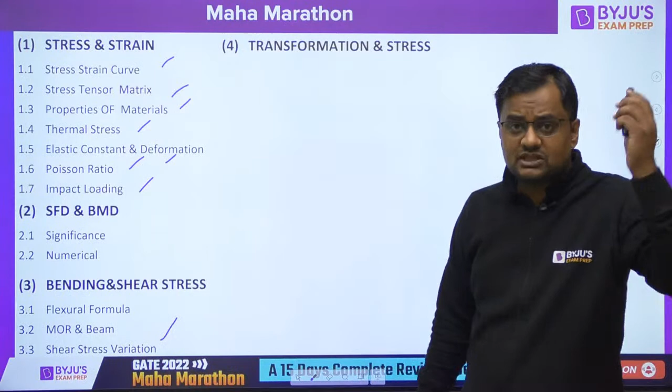Analytical method, graphical method, Mohr's circle for strain, then torsion, shear center, spring, column, then pressure vessels, thin and thick shell. But of course guys, this will be done in two sessions.

Today, most probably we'll be doing the first chapter, second chapter, and third chapter. This is more than half of the SOM. The first, second, and you can take it as third and fourth - bending stress and shear stress separately. So these things we'll be covering today, and that will be more than half of the SOM.

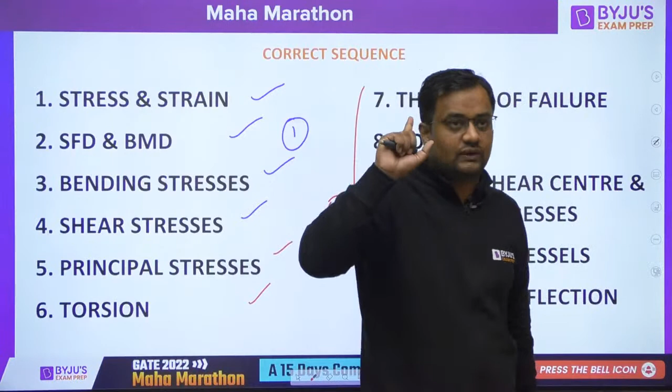So guys, one thing I want to tell everybody, very important information - how many tests I have to give. Many questions are coming to me on my mail or my Telegram: Sir, how many questions do I have to give? How many tests do I have to give? Let me tell you the answer.

Guys, if you have not started giving tests till now, you have to only give full length tests, not the subject test. Another thing - how many tests sir? If you are giving the test for analyzing your mistakes and improving the concepts where you made mistakes, let me tell you - whatever wrong you do in the test, you will again study that concept, again grasp that concept, or if there's some other question you don't know at all, then those concepts you will study.

If you are giving tests for that purpose, the number of tests should be at least 15 to 20. Whatever mistakes you make, whatever concepts you don't know, you will study those again. But if you are giving the test only for time management, you won't be studying those questions or concepts where you made mistakes. You will do your own revision irrespective of the test series. In that case, at least 5-6 tests are enough if you're only doing it for time management.

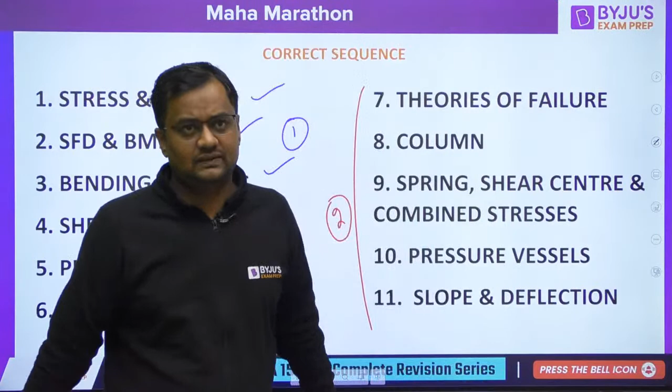Let's move further. The book for SOM is Gere Timoshenko, guys. So let's start the first chapter, stress and strain.

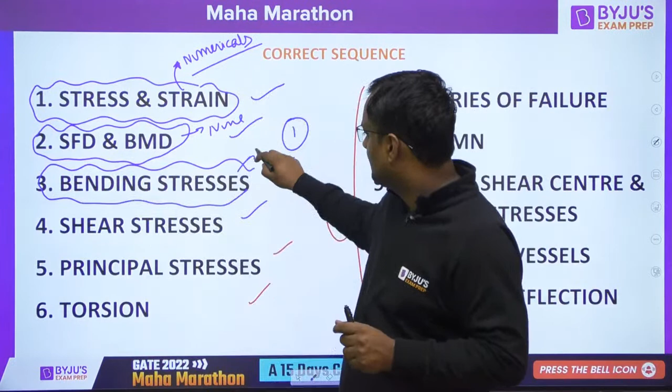After completing this chapter we'll be doing numericals. This will be a very, very big chapter, then this will be small. Then we'll again be doing numericals here also today. Then we'll be studying this, and doing numericals here.

Let me tell you one more thing. Let us try to do principal stresses also today if time permits, otherwise we'll do it tomorrow. Guys, those numericals, 90% will be new, that I have not ever taken in any of my previous classes.

But guys, again, many students are thinking that if sir teaches us, that will be enough, we'll give the exam. Guys, see, this is a GATE exam. Around 1,30,000 people will be fighting for the rank. And out of this 1,30,000, I never ever believe that the competition is 1,30,000.

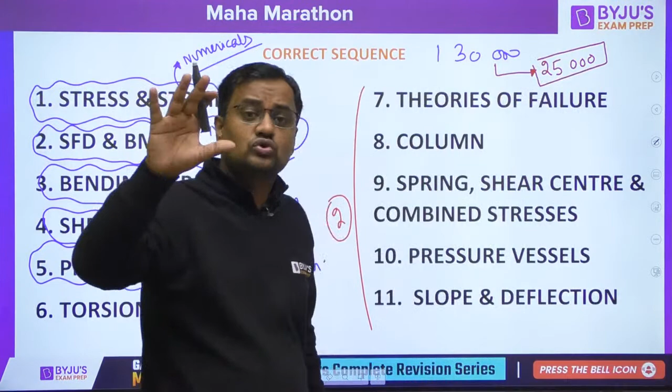No. Out of this 1,30,000, guys seriously preparing will be only around 25,000. Seriously means those who have covered more than 70% of the syllabus. If a student has only completed 40% of the syllabus, I am not considering him serious. So that will be your real competition, guys, everybody.

Now, moving forward, let us come to the basics of SOM, from where the subject originates. Where did this subject come from, where do people come from, like in the Jolly LLB dialogue.

Where is my session? Okay.

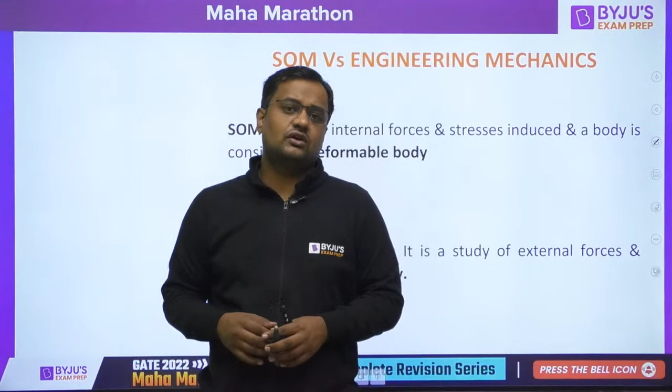Any body, suppose this is a body, and in this body if I apply a force like this, P1 force, if I apply a force like this, P2 force, and if I apply a force P3 like this, and the body has 2 points, suppose A and B here, and whatever the number of forces I am applying, not 3, might be 10, might be 20, whatever the number of forces, whatever be their magnitude, whatever be their direction, if the position of A and B is not changing, then that is called as rigid body.

Then that is called as rigid body. If whatever be the number of forces, not 3, suppose 15 forces, 105 forces I am applying, and after the application of those forces in any magnitude, in any direction, if the position of A and B is not changing, that is called rigid body.

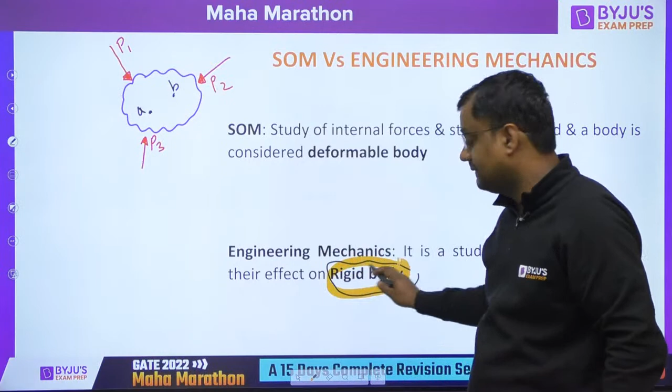In your 11th class, Monimita, actually spring is not in the syllabus. They have not mentioned the word spring, but sometimes they ask the question.

Now guys, see, whatever the number of forces, if the position of A and B is not changing, that is as it is, that is a rigid body. Whatever you have studied in 11th class, Newton's law of motion, gravitation, S equals ut plus half at square, rotational motion, gravitational motion, every physics, that 11th class physics, that blue HC Verma, everything that is rigid body, consider the body as rigid. Engineering mechanics, you consider the body as rigid.

In real life, no body is rigid. Sir, iron is rigid, sir. Guys, come on, what if you apply the force, iron will, the dimensions of iron will be changed. That little change is not visible by naked eyes. That little change might be 0.000000001 into 10 to the power minus 5 meter, or a micrometer. So nobody in this world is rigid.

Every body is deformable body. Deformable means, guys, the position of A and B changes. Either the body shape will be changing, dimensions, A and B will become closer or move farther, or the orientation is changed. That is deformable body. And first time a student studies deformable body when he comes to strength of materials. See this, like this chappal, okay, this compressing, this is a deformable body.

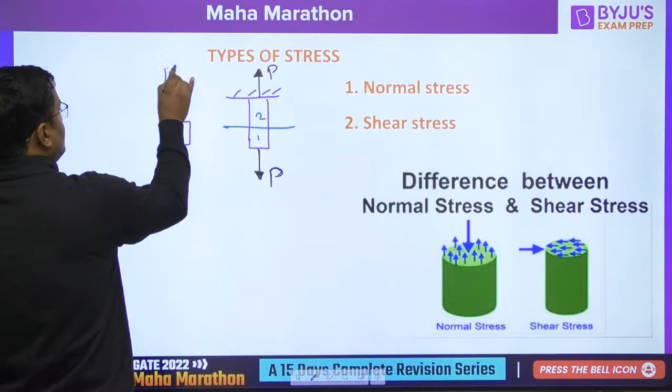Then after cutting the body from here, this is 1, this is 2. Many people know this already, let me just tell you very fast so the time is not wasted. This is 1, this is 2. In one body, the external force that I am applying, that machine is applying - externally I am applying it, I am applying the force. This is external force. Suppose somebody broke my heart, it's paining, that is internal force.

Now see, this is P force, this is external force, means somebody is applying or support reaction is coming. So guys, whole body is in equilibrium. This body is in equilibrium. So small body has to be in equilibrium. If this whole body is in equilibrium, so small body has to be in equilibrium.

So making this equilibrium, a P force is coming like this. Now it is in equilibrium. See, this whole body is in equilibrium, so a small part is also in equilibrium. Guys, if I am in equilibrium, my nose is also in equilibrium. My nose is not going to office. Right now I am in my home, so my nose is also in my home. So this P force is going upward, so for balancing, P force is going downward. Okay, sir, got it, sir.

So stress is internal force by area, this P by A. Stress is not external force by area. No, not at all. Internal force by area. Okay, sir, got it, sir. What is internal force? The external force is what you are applying, or a machine is applying, or a support reaction. What is internal force? Internal force is that which is obtained after cutting the section. See, here no force is applied. After cutting the section, to balance it, internal force is coming. Actually, no force is here.

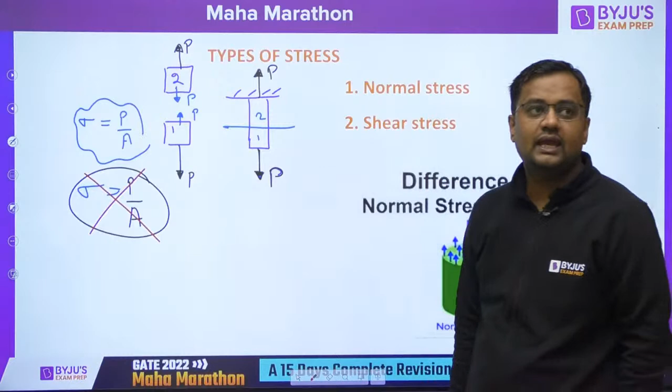Okay. Sir, what is shear? Normal stress is where the internal force is perpendicular. And shear stress is where it is tangential. This is normal, this is tangential. Sir, where will tangential be coming? Where will tangential be coming?

Let me show you. Suppose this is a beam. See above your head, there are many beams now. One, two, and third is here. Three beams here. Now, if this is the beam and supported over a column, this is my beam. Abhinav sir's beam. Abhinav's home. And this is the beam, and here is the column. Making a simple case, actually the beam is not that simple as you are seeing.

And I am living on the 9th floor. Oh, okay. Vivek. I'm not teaching. Vivek, not enjoying? You can go. Okay, so Joshi sir is also here. As I told you earlier, I showed you the pic also. Joshi sir will be coming at 5 p.m. Very soon he will be coming to my home. Joshi sir, at what time are you reaching here? Please let me know in the comment section. Kahan gaye Joshi sir? Oh yeah, Joshi sir is also here. Where have you reached now? And put a screenshot. Okay. Now,

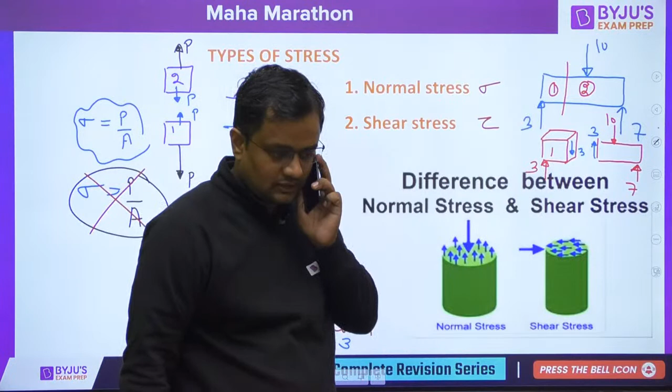So this 3 is upward, so 3 is downward for balancing. And here 10 is downward, 7 is upward, so 3 is upward for balancing. So this 3 on this section is shear. 3 shear, tangential force. So tangential force upon area is shear stress. Okay, now one question, everybody, please reply. Let us see who can reply fast.

This is, suppose, Joshi sir's suitcase, and he is on a railway station. This is the platform. This is Joshi sir's suitcase. And here, suppose Joshi sir is sitting over it. The platform is too crowded, he is not getting any seat. And Joshi sir of 80 kg is sitting here on the suitcase.

Let me know what are the stresses coming on this soft, delicate suitcase? Everybody, please let me know. What are the stresses coming? Is it normal? Is it shear? Is it zero stress? Ground reaction will again be 80 kg for balancing, because the suitcase will be in equilibrium.

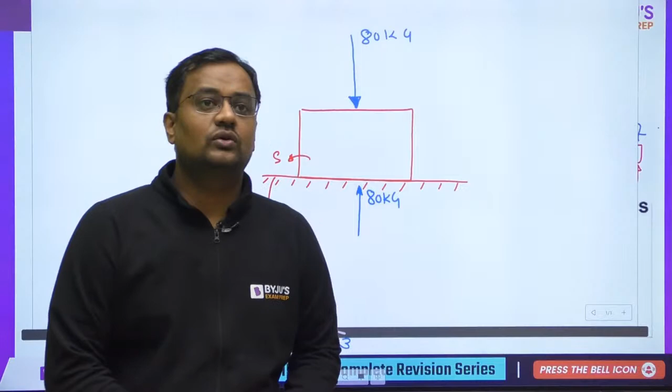Okay, Rupesh, everybody, good morning. Please let me know. Okay, guys, Aman is there. Nitish, Lavanya, Sarang, Alok, Himanshu, Sarthak, Karan, Kalidasan. 100%. Diksha, you also? Normal? Himanshu, Aman, I got your answers. Come on, Mohammed, Alok, Guna, my God, you will give me a heart attack. Oh, good, Kushagra. Good, Varsha. Only 5 people. Varsha, Himanshu, and a couple more. You will give me a heart attack here. In online, the teacher will die.

Those who are coming to my classes on YouTube or the app, many times I told you, 99% who say normal are wrong. Good, Jyoti. Guys, that depends on the plane. If I cut this plane, suppose this XX. On this XX plane, yes, this force is normal. On the XX plane, sigma xx is coming, but there is no tangential component. On XX only normal force is coming.

But as soon as I take a YY plane, this 80 kg is like this. So this has 2 components. One is like this, one is like this. This is suppose alpha, this is suppose beta. So normal stress on the YY plane is alpha upon area of YY, and shear stress on the YY plane is beta upon area of YY. So sigma is also coming, shear is also coming. That depends on the plane.

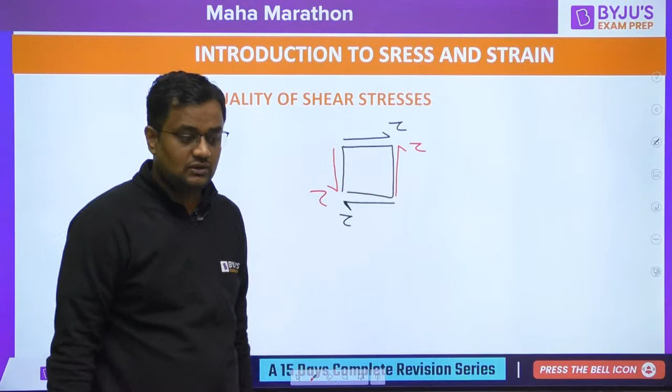Guys, can you tell me one thing? This question has been asked many times, not only in GATE but other exams as well. Two times in MPPSC, a couple of times in APPSC, and one time in Karnataka in the last 5 years. My question is, why are the opposite stresses equal? Please let me know.

Opposite face stresses are equal due to which equilibrium? Please, everybody, in the comment box. And why are adjacent faces equal? Opposite faces are equal due to force equilibrium, and adjacent are equal due to moment equilibrium.

Let me make you feel it now. Everybody, please see. See this opposite tau, the black ones. If one of them is bigger, the body will move to the right side. We study equilibrium bodies. If this red tau is bigger and this is smaller, the body will move upward. If this tau is bigger and this tau is smaller, the body will move downward. So opposite are equal due to force equilibrium.

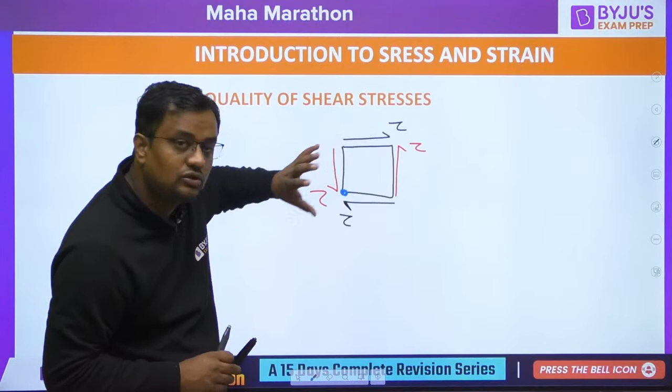And suppose I consider a moment about this point, blue point. See, both are passing from here, so no moment. If this black tau is greater than this red one, black about this is clockwise and red about this is anti-clockwise, assuming this to be a square element, although the validity is for every body. Suppose black is greater, making it clockwise about this blue point, and red is anti-clockwise. So this will move clockwise if black is greater. If red is greater, it will be anti-clockwise.

So adjacent are equal due to moment equilibrium. Many times this question has been asked. And opposite are equal due to force equilibrium. Okay, great. Now guys, let me tell you what is this stress in 2D, 3D.

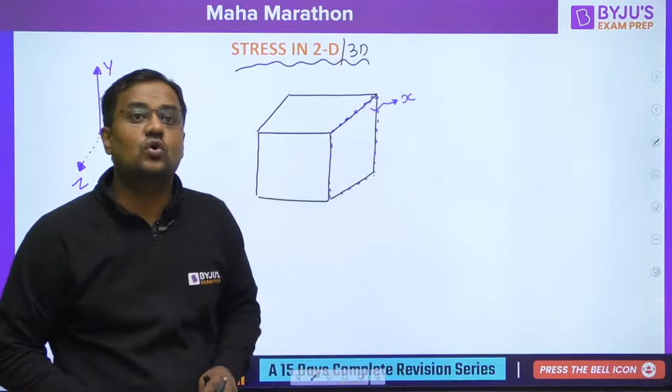Those who are saying XY, they are going into the coordinate system. So this is X face. Now this face, this red face. Outward normal, going outward, not inside the body. Outward is going in Y direction. So this is Y face.

Now, similarly, what is this face? I will tell you very interesting things here. Outward normal is going in Z direction, so this is Z face. Okay, great. Now, what is the name of the base where it is resting? What is the name of this base face?

Come on, Raghu, very close. Come on. Guys, what is the name of the base where it is resting? Yes, Raghu, good. Mokshin, Kalidasan, good. Nitish, Jyoti, good.

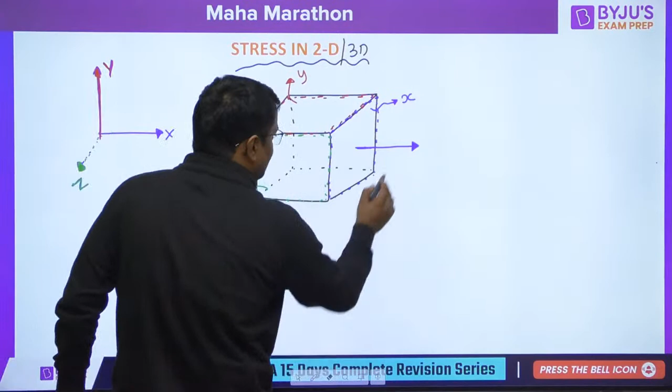In this face, what is this purple arrow? What is this stress, sigma or tau? Is it sigma on this x face, or is it shear? Sigma, because it is normal to the x face. Sigma, then the name of the face, x face, then the direction, x direction. Simple. Now similarly on this purple face, what is this? Normal or shear? Shear, tangential.

Come on, yes, everybody is correct. This name is tau. On which face? First word is face, and second word is direction. On x face, in which direction? Y direction. Simple. Everybody, what is the name of this? Tau. On which face? X face. In which direction? Z direction. Understood. Everybody now champion.

Guys, this is normal or shear? On Y plane, this is normal or shear? Everybody, come on, Mansoor, Jyoti, Vasu, how are you? What is this, sigma or tau? This is sigma, perpendicular to this red body. The first word is face. On which face? Y face. Second word is direction. In which direction? Y. Understood, sir? This on red face is shear.

Where I write, this is shear. On which face? Y face. In which direction? X direction. Now this shear. On which face? Y face. In which direction? Z direction. Understood, sir? Now I am coming on this green face.

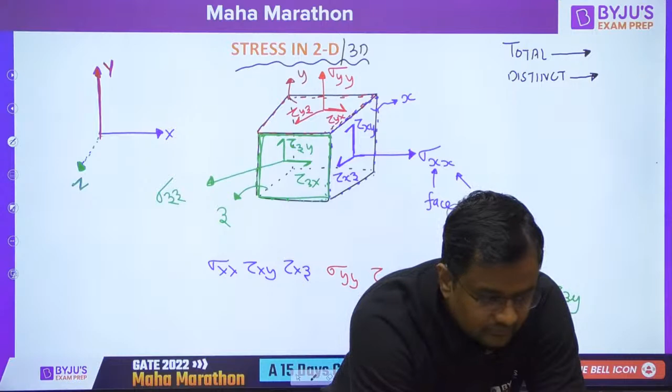Guys, GATE has asked this question. How many total number of elements are there? How many distinct elements are there? What is the total number of elements and what is the distinct elements? Come on guys, reply. Soon we'll be going to the questions of the first chapter as well. Yes, great.

So total number of elements are 9, 3, 3, 3, 9 and distinct are 6. Why distinct are 6 guys? Because we just studied that adjacent face stresses are equal. Good. Everybody is champion here. Whole competition of the GATE is lying here in this channel.

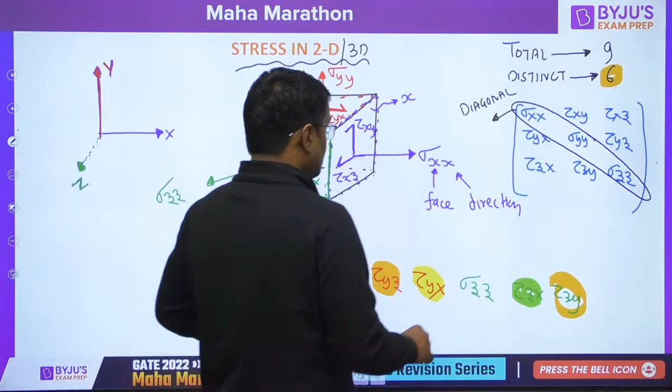Okay. Now guys, this is symmetrical about the principal diagonal. This is the diagonal, and it is symmetric about this. Please check whether it is symmetric or not. See, tau xy and tau yx are same. They are same. Similarly, my friends, tau xz and tau zx are same. Similarly, tau zy and tau yz are same. So it is symmetric about the principal diagonal.

Got it? Shubham, you got it now? How distinct 6? Okay. So this is symmetric about the principal diagonal. So if somebody asks you why it is symmetrical, the answer will be moment equilibrium. The adjacent faces are equal due to moment equilibrium.

Okay. Now what is the order of tensor? Guys, see. 3 to the power x, where x is the order of tensor, is equal to the number of elements. Number of elements in 3D case: 1, 2, 3, 4, 5, 6, 7, 8, 9. So x is equal to 2, that is the order of tensor. So if anybody asks you what is the order of tensor of stress, it is 2. Stress is not a vector. Stress is not a scalar.

Why not vector, sir? It has direction. Sir, normal stress has a direction, shear stress has a direction. No, because guys, it does not follow the parallelogram law of addition. They teach wrong in school. NCERT is wrong. Okay, Joshi sir.

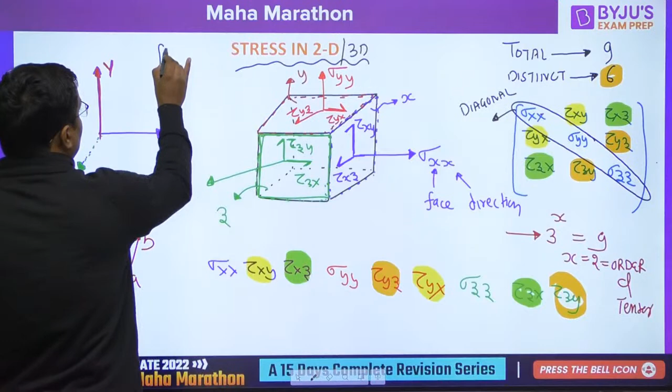Guys, this is in 3D. In 2D, how will it be? See, remove Z from there. Sigma xx, tau xy, and here tau yx and sigma yy. In 2D, this Z will not be there.

In 2D, total number of elements are 4: 1, 2, 3, 4. Distinct are, see everybody, this and this are same. So 1, 2 and either of these two, only one is required. So distinct are how many? 3. And order is only calculated in the 3D case.

Have you got it, everybody? Just put a heart sign if you got it, guys. Have you enjoyed the concept or not?

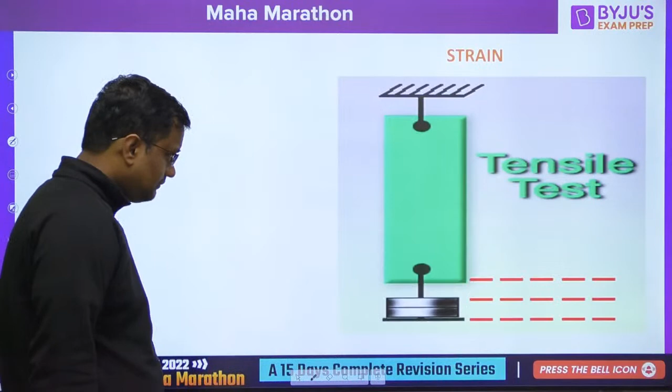Okay, now guys, what is strain? Sir, stress you have taught everything: the matrix, the direction, nomenclature. What is strain? Guys, since we are studying deformable physics, in deformable physics there is some strain. Let me tell you. In deformable physics there will be some deformations. Length will be changed, either increase or decrease.

Suppose this is a body. I am applying force. The length was L and it is elongated by delta. Why elongated? Because it is deformable physics. Strain is equal to delta by L.

My two questions, and you have to write the answer in a single statement. Yes, Ahmed Sahab. You have to write the answer like this: A comma B. Don't write two answers differently. In a single comment I want the answer. Okay, hello Mudassir. First one, if I apply a force, of course deformation will be very, very small, not visible by naked eyes. My question is,

strain of a body when I apply force is in kilometers or micrometers? Write the answer here, then comma. What is the strain of a rigid body? First, unit of strain: should it be in kilometers or micrometers? Second answer, strain of a rigid body. Two answers you have to write. First, what is the unit of strain? And second, what is the strain of a rigid body? Everybody, let me know the answers. Come on.

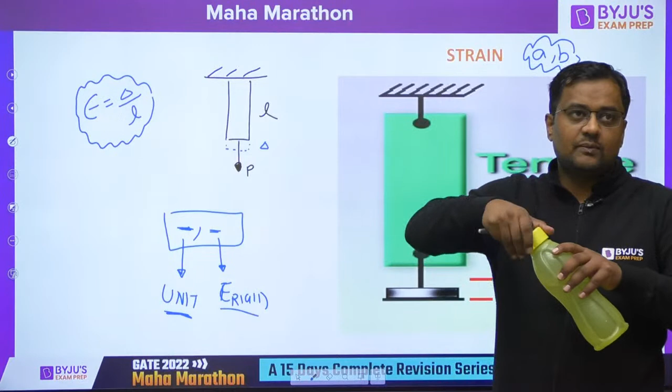It should be in kilometers or micrometers. Okay, strain is unitless. Now everybody is correct. Unit of length cancels, it is unitless. Strain is always represented as a ratio. And for rigid body it is 0, because rigid body delta will be 0.

Now similarly shear strain is also there, like shear normal strain is this. Shear strain is, when I apply a shear stress on this, since it is deformable, it will be changing like this, or it will be changing like this. Earlier the angle is 90, now angle is 90 minus gamma. Earlier the angle is 90, now angle is 90 plus gamma. So the change in angle is shear strain.

Change in angle is shear strain. Here many times in books they make this change in angle gamma. So this is gamma by 2 and this is also gamma by 2. Earlier the angle is 90, now gamma by 2, gamma by 2 each side. Here also it is increased by gamma by 2 on one side and gamma by 2 on the other side.

Sir, why are you 100% sure that if it changes from 90, the earlier angle is 90, now it is 90 minus gamma, how are you so sure it's gamma by 2? Because all tau are equal. Force equilibrium, moment equilibrium - all tau are equal, therefore the deformation will be symmetrical. Therefore, if the total change is gamma, it will be gamma by 2, gamma by 2.

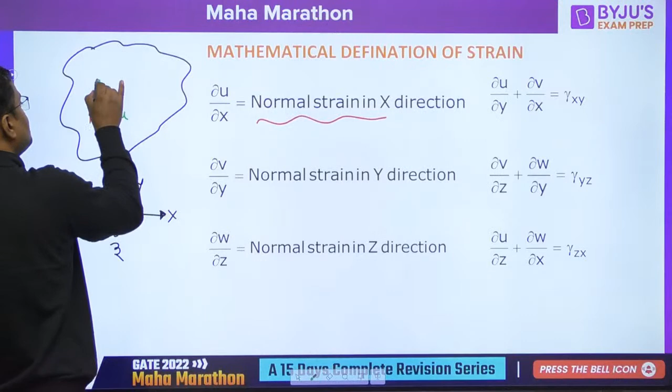What is this? Let me tell you. Suppose this is a body, and my direction of x is like this, my direction of y is like this, and coming directly to your forehead is the z-axis. Suppose this is a point P on this body, and small displacement in x direction is u. This body is acted upon by forces. Small displacement in x direction is u, small displacement in y direction is v.

Small body, P is any random point on it. Small displacement in x direction is u, small displacement in y direction is v, and small displacement in z direction is w. So del u by del x is called normal strain in x direction. Del v by del y is normal strain in y direction. Del w by del z is normal strain in z direction. And here is the shear strain.

Now stress strain curve, everybody. See, whatever we do - suppose this is a body of mild steel, I am applying a force like this. Initially the length is L0, initially the area is A0. So whenever I say stress is equal to force by area, that is engineering stress.

By default we study engineering stress only. Whenever I say strain is delta by L, initial length L0, that by default is engineering. When I don't say anything, that means it is engineering. Engineering means force by original area. Engineering strain is delta by L0, original length - that is engineering. And by default, whenever I say stress, strain, that is engineering.

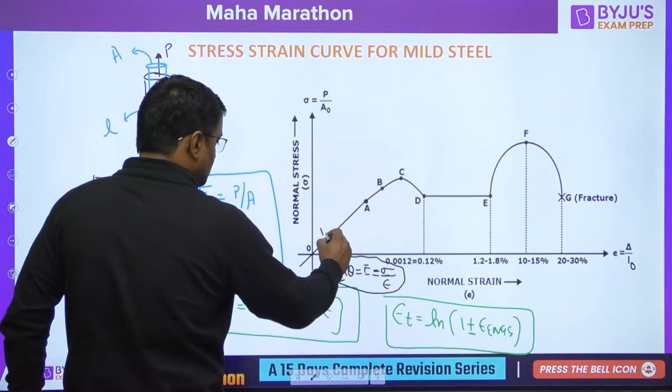So O to A is linear for mild steel. For copper or aluminum, it is not linear — that depends on material to material, how it behaves. With this much stress, there is this much strain for softer materials, and for rigid materials, this much stress gives almost no strain. Now from this, A is the proportional limit.

This A is the proportional limit, up to which it is linear. B is the elastic limit.

What is the significance of B? Its significance is that before B or at B, the strain in the stress equation is true strain or engineering strain — it is engineering.

B is the elastic limit. What is the elastic limit? At B or before B, if you remove the loading, the material comes back to its original position — whatever the original length was, it returns to zero strain.

But if someone stresses the material beyond B, beyond the elastic limit, and then releases the loading, it will be permanently elongated or permanently compressed. This is called permanent set or permanent deformation. So if you remove the loading before the elastic limit, it returns to its original position; otherwise, the dimensions will be changed.

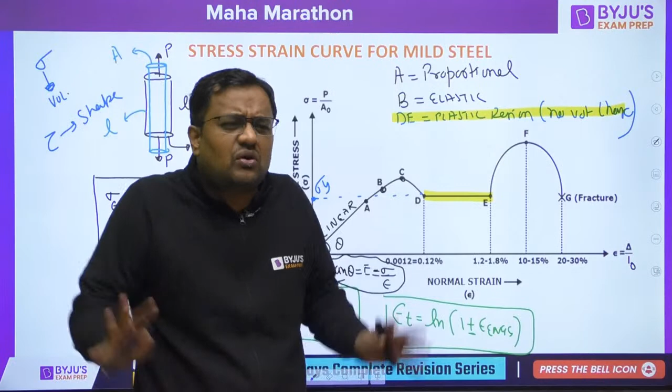When I was a student, what I used to think about this region — and most of you are probably thinking the same — is that strain happens here without any force. We assumed that because the material is so dull, strain happens without any stress. Are you thinking the same thing? Please let me know.

I was also wrong that time. This region actually means that at constant stress, strain is happening — force is there, and only with force is strain happening. It is at constant stress that strain occurs. But we used to think, when I was in college, that strain happens with zero stress, zero force — no, if strain happens with zero force, that is fluid behavior.

If strain happens with zero force, that is fluid — that is, zero stress causing strain. Now from E, the crystalline structure changes. At E, the crystalline structure changes and the material starts imparting resistance for further deformation.

The crystalline structure changes — after E, the molecules rearrange themselves.

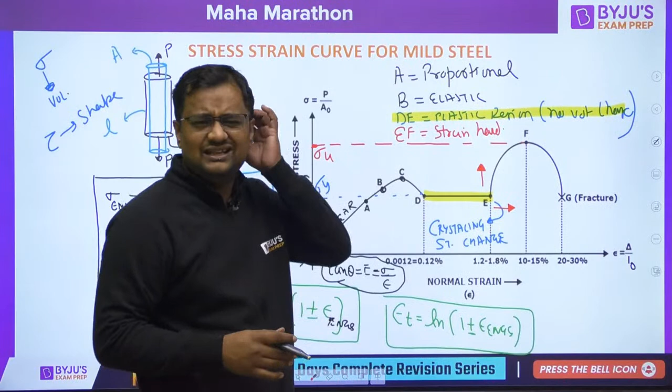After that, now material will fail. That will be necking region, having cup cone failure at 45 degree. Necking region means when it will be failing...

Something like this. This is cup cone failure at 45 degree, and this is necking region. When the diameter is reducing, it will reduce like a neck, and it will fail. This is necking region. Have you got it all of you?

Now for brittle material, always remember concrete is a brittle material, very commonly used for civil engineers.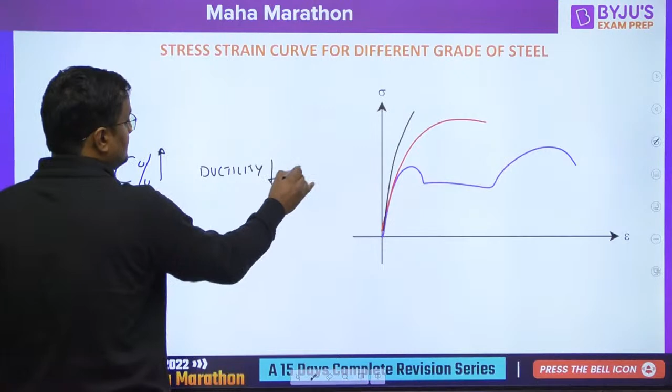What you observe, as carbon percentage is increasing, guys, ductility is decreasing. Young's modulus is same, and ultimate strength is increasing. See, Young's modulus is tan theta. Since initial graph all are overlapping, Young's modulus is same.

This is less carbon percentage, more carbon. When the carbon percentage is less, it is failing at high strain, so more ductile. With increase in carbon percentage, it fails at less strain, less ductile, even more less ductile. So ductility decreases, but strength it can take more. So ultimate strength is increasing.

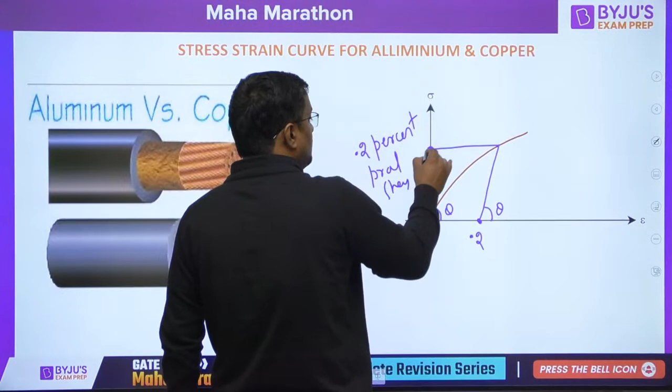What we will do now? We will go to 0.2% strain here, and draw a line with theta angle. Now sir, what is theta? Initial slope of this curve is theta angle. So we'll draw a line. Whatever stress comes, we will call it 0.2% proof stress, or we will call it sigma y, yield stress.

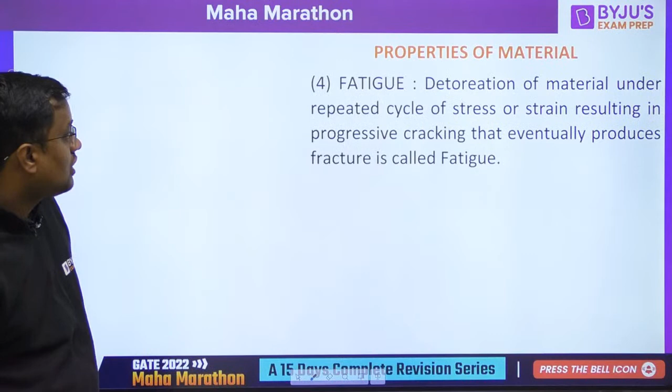Okay. Now fatigue is deterioration of material with cyclic loading. Suppose this is the copy, my hydrology notes. So I am doing like this, I am doing repeated cyclic loading. And when it fails due to this cyclic loading, that is fatigue.

And of course, if more is the stress, less number of cycles will be there. If less is the stress, more number of cycles will be required. And if very less is the stress, just touching, infinite cycles also will not make it break. Okay. So if I make a graph like this, here is the number of cycles and here is the stress, then the graph will be something like this.

If more is the stress, the number of cycles will be less. If less is the stress, number of cycles will be more. And there is also a stress called endurance limit. Below this, there is no failure. Even with infinite number of cycles, there will be no failure.

Okay, resilience: for any material, up to the elastic limit, whatever is the area, that is resilience. And toughness is the total area. Might be any curve. The total area is toughness, modulus of toughness. For mild steel it is like this; up to yielding, that is resilience.

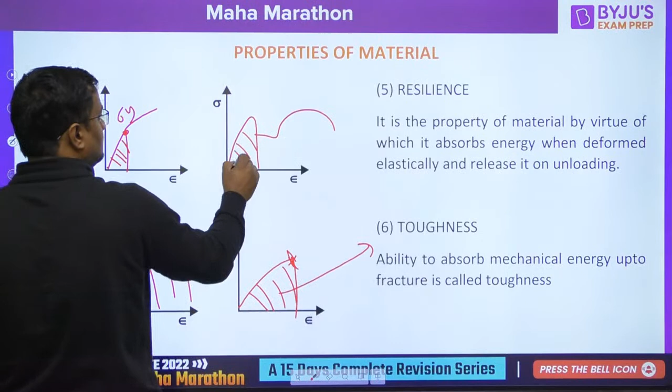Sir, what does resilience show? If the area is more, then what? What is the feeling? Okay, sir, we understood that area up to yielding point is modulus of resilience, and area up to last point is modulus of toughness. But tell us the feeling also. It's the partial area, only up to yielding, up to this yield stress, and area up to the last point, fracture, is modulus of toughness. Okay sir, but what is the feeling?

No Mudassir, impact stress is double of the static stress. Let me just tell you in very short. What is the normal stress here? P by A, but sigma sudden will be 2 times of this. Whatever stress we study in SOM, all are static stress, P by A, force by area. Sigma sudden will be twice if the impact is from zero height.

Now see, this area under the stress strain curve is strain energy per unit volume. That is also correct. But what is the feeling? That area is strain energy per unit volume up to yield point. That is strain energy per unit volume up to fracture. But what does it mean? Guys, let me tell you the significance. No, Sandeep Kumar, strain energy per unit volume is not the significance.

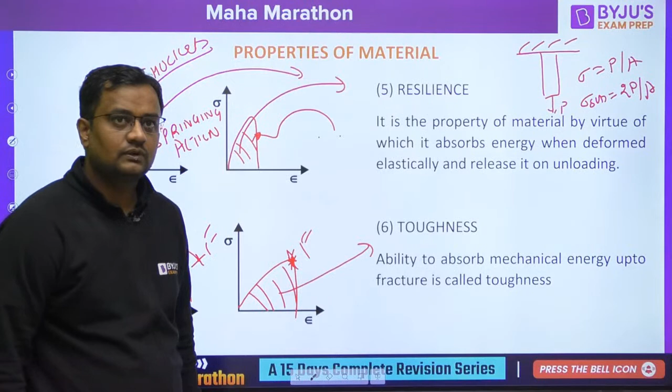Great. Now hardness is the ability to resist against scratch. Scratch should not be coming. That is hardness. Elastoplastic means first elastic, then plastic. Elastoplastic with strain hardening is not easy plastic like this. Plastic with strain hardening, so that for strain you have to apply the stress as well. Not as easy.

Now ideal rigid is like this. What is the Young's modulus of ideal rigid? Either you can see the angle is 90, so it is infinity, or you can see stress by strain. Strain is 0, so Young's modulus will be infinity. Ideal fluid: without stress, strain is happening. This is fluid, without stress, strain will be happening. Got it or not?

Everybody please let me know. Have you got it? Any doubt? Anyone is having?

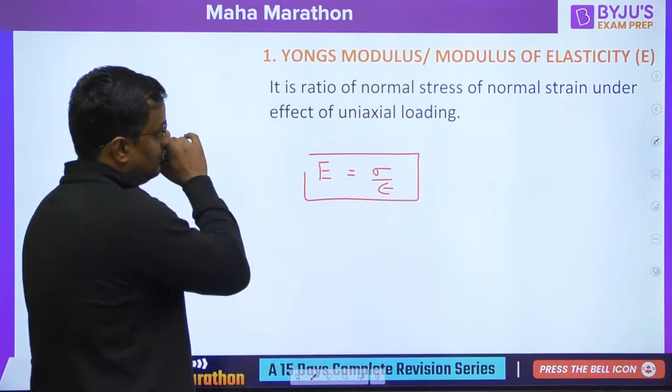Now Young's modulus is normal stress by normal strain, defined only for uniaxial loading. Shear modulus is shear stress by shear strain. Young's modulus is normal stress by normal strain. Shear modulus is shear stress by shear strain. Bulk modulus is hydrostatic stress upon volumetric strain.

Hydrostatic stress means suppose the body is like this, then triaxial stress sigma is coming from here, here and here. What is the change in volume? Then Poisson's ratio is lateral strain upon longitudinal strain. What is lateral? What is longitudinal? Guys, suppose this is the force I am applying. The direction of the force, not the bigger side, is longitudinal and the other is lateral.

The mu value is from 0 to 0.5 for metals. If they ask a question for metals, it will be from 0 to 0.5. If they ask for any material, it will be from -1 to 0.5, because human tissues and soft polymers can have minus also. The relation between E, G, mu and K will be like this.

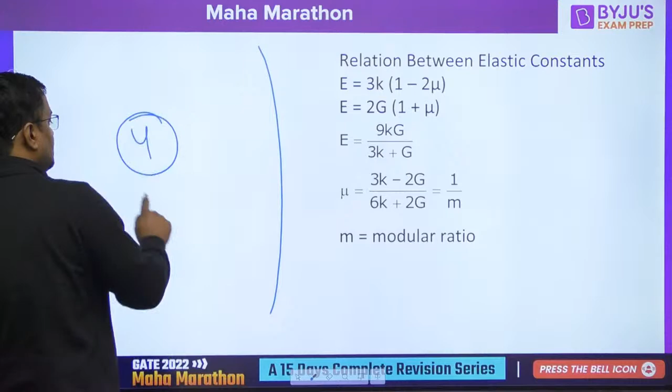Total elastic constants are 4 for isotropic, independent are 2. Because suppose you know K and mu, so E can be found. Once E is found, and mu you already know, G can be found. Any two, not necessarily K and mu. Suppose K and G: with K and G, E can be found, and mu can be found. So the number of independent elastic constants is 2, here 9 and here 21, but only that is in our syllabus. Uniform sections I'll tell you with the help of questions. Mu we have done.

Guys, suppose temperature is increased, so length will be increased. Delta L is equal to L alpha delta T. Change in B is equal to B alpha delta T. Change in depth is equal to D alpha delta T. So there will be no stress at all. When we apply a temperature, the body can elongate, no stress.

Guys, soon we are coming with the questions. Please sharpen your pencil. Total elastic constants are 4. For other, Mudassir, anisotropic and orthotropic are not in the syllabus, not required. Yes, Mansoor Ahmed, alpha is this.

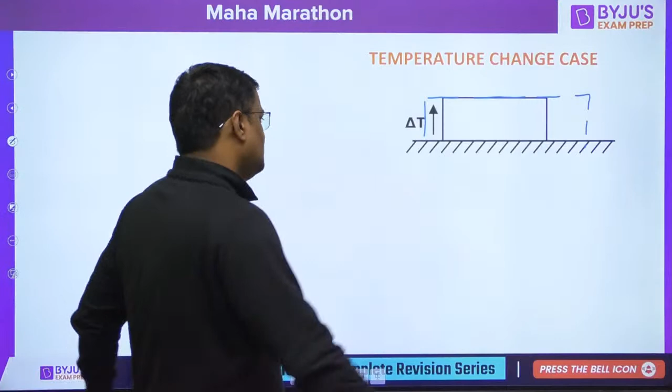Now, guys, when I am applying the temperature, if it can increase and nobody is restricting it, no stress at all. But suppose it is fixed.

Now I am applying an increase in temperature. It wants to increase but is not able to increase. In that case, stress will be coming. That will be E alpha delta T. Suppose you are heating it, increasing the temperature. So it will be compressive stress.

It will be compressive stress because it wants to elongate, but supports are fixing it. No, don't elongate. So compression will be there. And if temperature is decreased, it wants to shrink, but can't shrink because it is fixed.

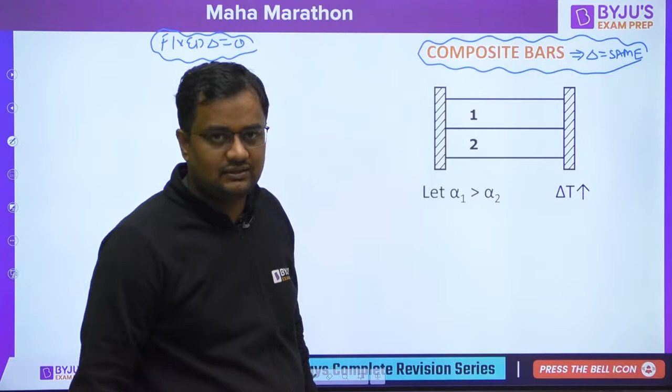Okay, now what do students do mistake in exam? Let me tell you. Here, guys, it will increase both sides. For simplification, I am telling you it is increasing only one side. Now, suppose alpha 1 is more, if it is free, there is no restriction. So 1 will increase more and 2 will increase less, but both will increase because temperature is increasing. It will increase both sides, left and right.

Now since it is composite, delta has to be same, so it will increase to this point. They will make a compromise, not this much long, not this much short. So first bar will go back. It wants to increase up to here, but it has to restrict itself, so compression will be there. The other has to be pulled up, so tension will be there. And in temperature decrease case, it will be vice versa.

Now, what mistake do students make? Many times I have asked them questions. In exam also it has come. If this is the case, this is 1, this is 2, temperature is increased. Again, alpha 1 is greater than alpha 2. In the fixed case, which is in compression, which is in tension?

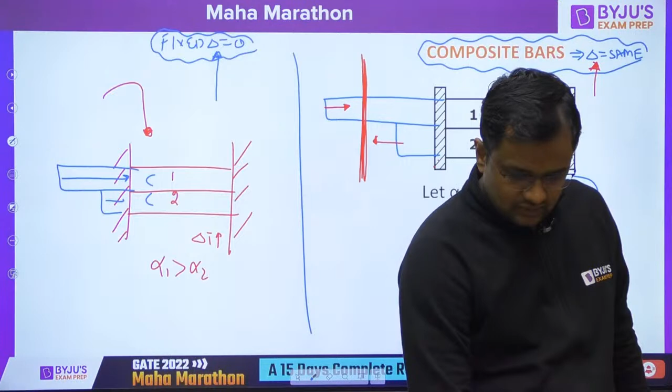Got it now? Come on, guys, grow up. I told you before starting this topic that here students make mistakes. Then also you are making mistakes. Come on yaar, how will this work like this? Got it now?

Please be ready with the questions. Very soon the questions will be coming, and 90% of the questions will be new. Now everybody let us know how much you have understood, and how much you knew earlier as well. A steel bar of cross section this and 2500 mm long.

This is 2500 mm long. And the dimensions of this are 40 into 40. Subjected to an axial pull of 130 kilonewton. Axial means the longer one. The modulus of elasticity is given, this is E, and Poisson ratio is given as 0.35. The alteration in the length and sides of the bar during the extension are?

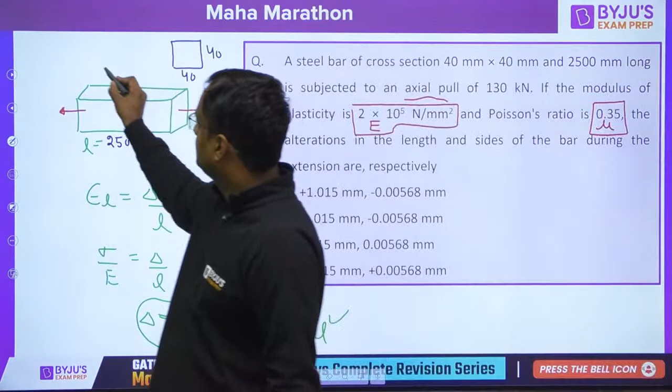Any doubt here? I'm not wasting time in calculations. Got it? Now, suppose this is x direction, this is y, and this is z. Now please see, minus epsilon y upon epsilon x, minus of lateral upon longitudinal, is Poisson ratio.

So epsilon y is equal to minus mu epsilon x. Epsilon y is the change in y direction, that is lateral, delta y upon length, which is 40. Mu you know, and epsilon x also you know from here, that is sigma by E: 130 upon 40 into 40, upon E. From here you can calculate; it will be minus, because if one is increasing, the other will be decreasing.

Of course, if this is an axial pull, it means tensile. So this can't be the answer. How can the length in the axial direction be minus? If there is a pull, it will be elongation. So like this also we can do. And guys, here also without solving you can do it.

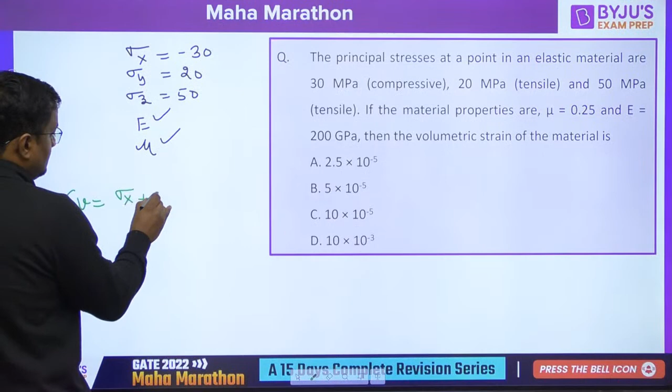Okay. So volumetric strain is sigma x plus sigma y plus sigma z into 1 minus 2 mu, by E. Sigma x, sigma y, sigma z are known, mu and E are known, so you can find out. C or A, whatever is the answer, you can do. Now this one.

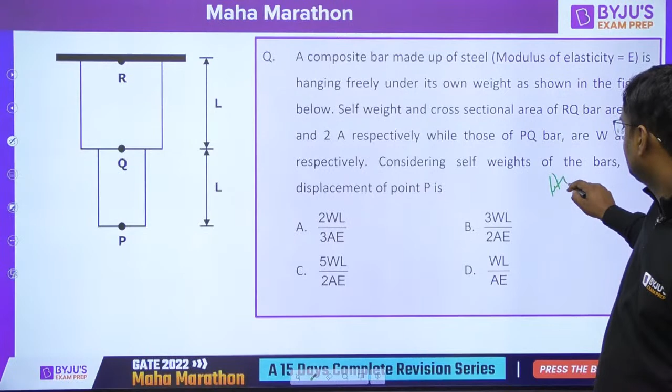Okay, let's come to chapter number 2. Ready? SFD BMD, AN method will be coming here. Are you all ready, guys?

So first of all, for stability, the minimum number of reactions should be 3. All should not be parallel, all should not be concurrent, not passing through the same point. And you will only say the condition is equilibrium when the supports are self-sufficient to take the load. If supports are very weak, then it will not be in equilibrium, it will break down.

Okay. Now this cantilever beam, one fixed, one free. Simply supported like this, one pin, one roller. Propped cantilever means one fixed, another roller. Fixed beam, both sides fixed support. Continuous beam, more than one support.

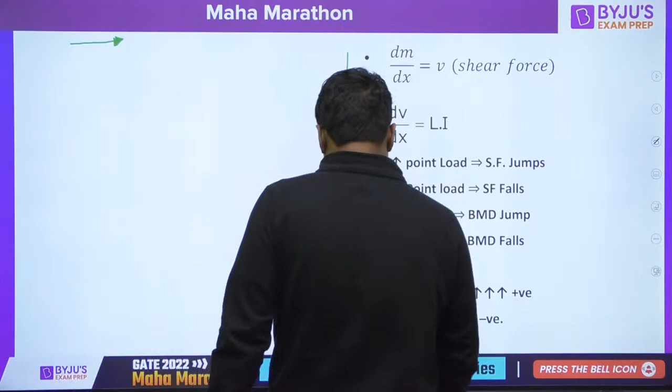Any question, and these are not tricks. If they were tricks, then it is only valid for few problems. These are all derivable things. I'm not deriving here, of course. So it is valid for every year, because these are derivations, not tricks.

Okay, the graph of this slope is positive constant. See, it is acute angle. Acute angle is positive, constant. This is also acute angle, but slope is decreasing. Like this, more angle, increasing, but acute angle, positive. Obtuse angle, tan 120, tan 130 is negative. Here it is obtuse angle, negative, magnitude wise decreasing, like this.

Okay, guys, one more thing. If you want more detail, you can see in Maha Marathon, I will be revising it. If you want the complete AN method, you can see the particular video where I have taught 1 hour only this.

Okay, guys, this is not Abhinav Negi method. I always tell that yes, I was one of the first who started using this method 10 or 11 years back, but that time nobody was using this method. Everybody was doing the long cut except 1 or 2 people in the country. But now many people are using this.

Okay. Now let's see how many people are there right now live. It's 115. Okay. Guys, guess who is here with the AN method?

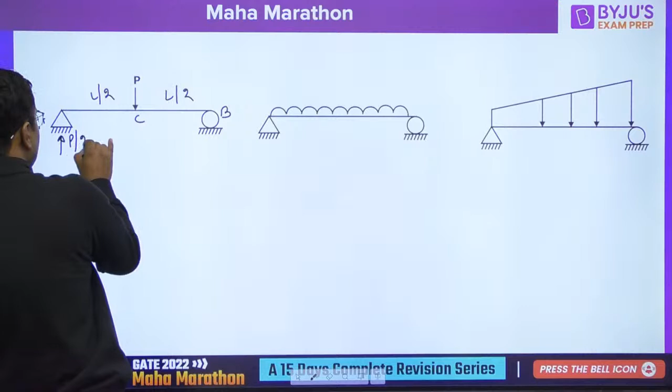L by 2, it is symmetrical, so it will be P by 2, P by 2. Just before entering, let me finish this table, then the superstar will enter. DE, this is W newton per meter. At center there will be some F. Total length L, per meter W, so WL, and it will be WL by 2.

This is D. This is E, somewhere between F. This is G. This is H.

Here I'll be making SFD. Here I'll be making BMD.

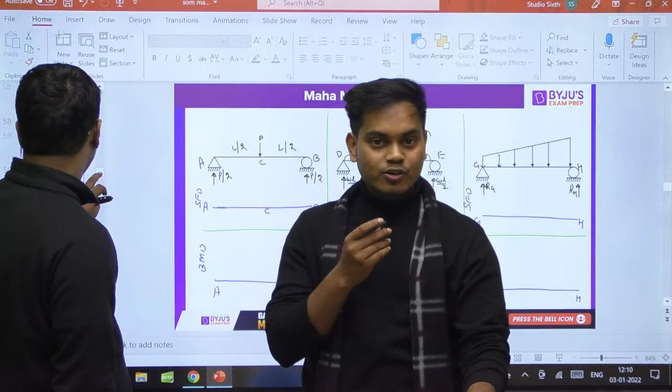In this particular duration, when you can say very less time is left, you are getting very detailed revision. So I think you all are full power hitting the like button and sharing the session with each and every friend of yours, right? How's the Josh? Everybody is here now. We are here to give you the best revision that you can ever have before your examination.

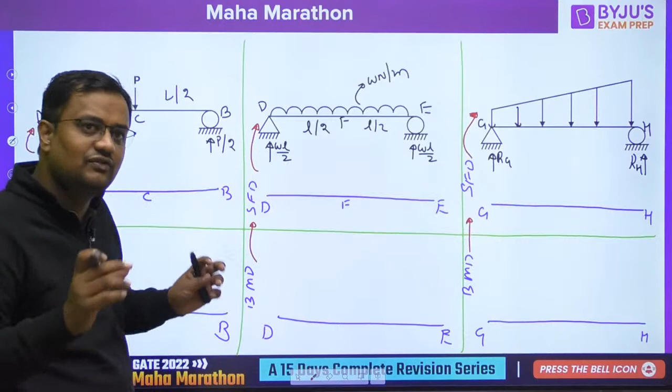From A to C, there is no load.

From A to C, no load. No load means load intensity is 0. So shear force slope is 0, because no load from A to C. That means shear force slope 0 means it is a straight line. Straight line has a 0 slope.

Then there is a downward point load P. Downward point load means shear force falls. It will fall from plus P by 2, falling by P, so it will reach minus P by 2.

From C to B, no load. No load means load intensity is 0. Load intensity 0 means it will be a straight line, because straight line has 0 slope.

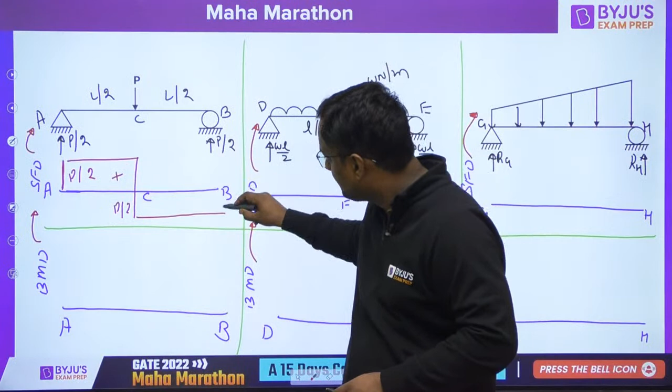Now upward point load, shear force jumps. Again upward P by 2 it will jump, and that will be the SFD.

Now coming to BMD. While drawing BMD, we have to see the SFD.

For drawing BMD, we have to see SFD. From A to C, shear force is positive and constant. That is positive constant graph number 1, drawn like this.

From C to B, shear force is negative constant. Negative constant graph number 4, drawn like this.

Okay, SFD, BMD, this method we are getting very quickly.

Now drawing for this second figure. Upward point load, shear force jumps by WL by 2.

From D to E, it is downward loading. Downward loading is negative and constant, uniformly distributed load (UDL). So downward means negative and constant, because downward is negative, and constant means uniformly distributed load.

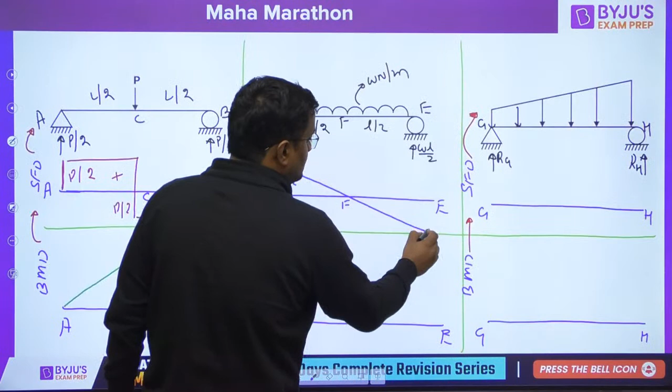From upward load, shear force jumps, it will be jumping like this. So this will be the SFD. Of course guys, if you don't make it like this with the upward load, it will not be closed and there's no use of that.

Now drawing the BMD. While drawing BMD, we have to see SFD.

From D to F, shear force is positive but magnitude is decreasing, more, less, less, less. Positive but decreasing magnitude-wise, that is graph number 2, drawn like this.

From F to E, it is negative, but magnitude-wise -5 is bigger than -2, so magnitude-wise increasing. Negative magnitude-wise increasing is graph number 6, drawn like this.

Please sit, Joshi sir, have some tea. Okay, so from G to H, third figure.

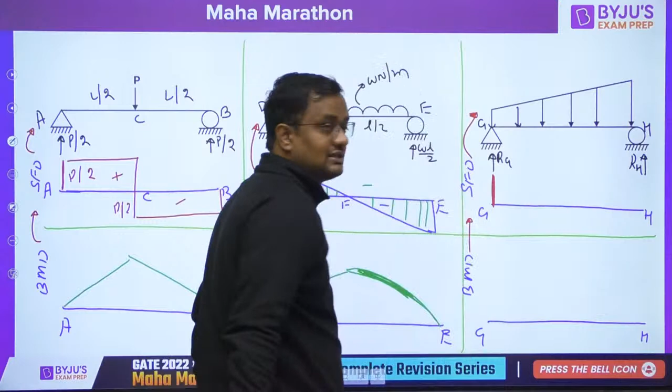Then from G to H, loading is downward. Downward is negative, and the negative magnitude is increasing. We have to go left to right. Loading is negative and increasing, so this is graph number 6.

Okay, Joshi sir is here. Let it be named J. So G-J, bravo. Now from G to J, from Goa to Joshi sir.

Shear force is positive but decreasing. From G to J, it is positive and decreasing, so graph number 2, like this.

Okay, from Joshi sir to Haryana, J to H, it is negative but magnitude-wise increasing. So J to H, negative and increasing, graph number 6. So like this will be the BMD.

Guys, there are various other points we'll see later - whenever shear force is zero, bending moment is maxima or minima. Also, for symmetrical figures, symmetrical loading, and symmetrical supports, BMD is always symmetrical and SFD is anti-symmetrical.

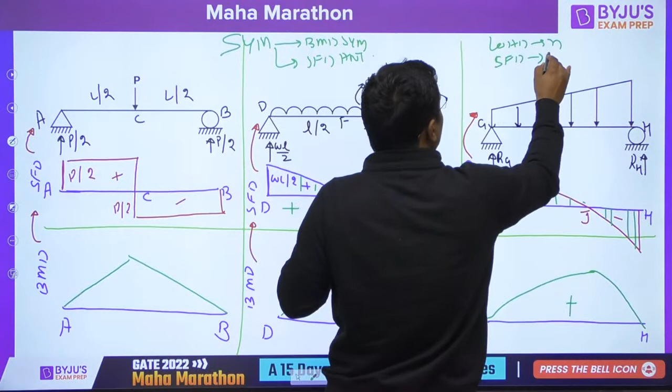That is not a symmetrical figure. And if the degree of loading is n, then SFD degree will be 1 more, n plus 1, and BMD degree will be n plus 2.

Why, sir? Come on. While differentiating, we get shear force, and the degree becomes 1 less. Suppose any function is y equals 3x cube plus 7, so differentiating it gives 9x square - from degree 3 to degree 2. Differentiating again gives 18x, one degree less. So whatever the degree is, each differentiation reduces it by 1.

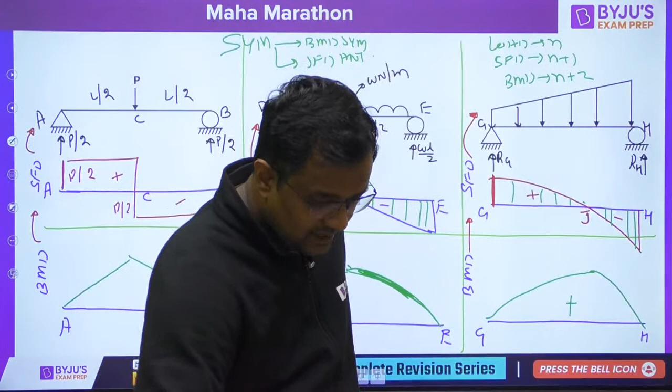Hyderabad, Dheeraj, Hyderabad, Kerala - the heaven. Nagpur, orange - orange burfi is very good. Karnataka, Visakhapatnam, Mirzapur, Ladakh, oh my god. Andhra Pradesh, Indore, Chappan Dukan, Sarafa, Trichy, Siliguri - oh, I have been to Siliguri a couple of times. Agartala, Tripura, Odisha, Patnaik, Coimbatore, Andhra Pradesh, Vizag, RK Beach, Rishikonda, Mumbai, Morbi, Bihar, Andhra Pradesh, Balaghat, Warangal, Dehradun - excellent. Bihar, Patna, whole India, from Ladakh to Tamil Nadu everybody is here, and from Agartala to Gujarat everybody is in the comment box. Great.

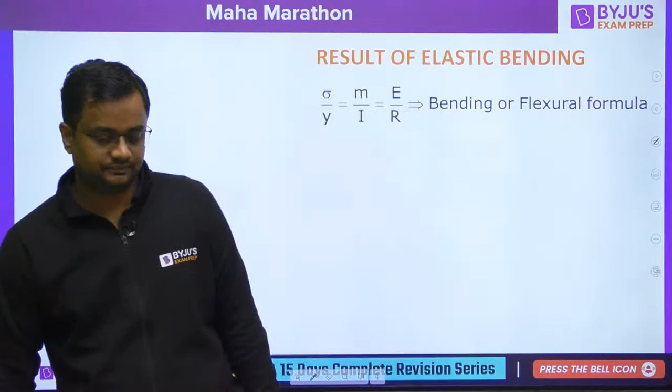These are all your assignments. Shall we go to the third chapter? Everybody enjoying till now? And let us do one thing. In this session we'll be doing only bending stress and shear stress. Then from tomorrow we'll be doing Mohr circle. Understood or not? Please let me know. Any doubt if you are facing till here? You are most welcome to ask.

Great. Okay. Now see, these were very small chapters, you will be getting it. Please see. Suppose this is a beam, and in this beam a moment M is acting here. This is called pure bending. What is pure bending? When there is no shear force.

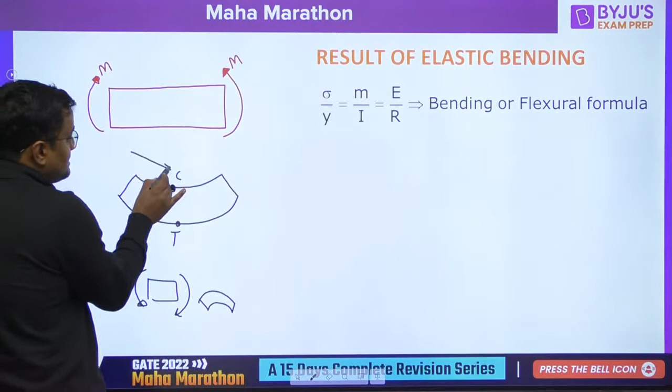Now moving forward, please see. So compression will be coming here and tension will be coming here. So here are compressive stresses and here are tensile stresses. But these are not stresses due to some force. It is not P by A. There is no force acting. These are bending stresses, not force by A, and bending stresses are like this.

At neutral axis, suppose the section is like this. So neutral axis is the centroidal axis. Total depth is D, so the centroid of a rectangle is at D by 2. And for a triangle it is 2h by 3, like that. Okay, thank you. So these are bending stresses at y distance from the neutral axis.

Let me make a bigger figure. Suppose this is the cross section, and the neutral axis will be the centroidal axis. Total depth is D, so the neutral axis will be at D by 2. For a triangle it will be 2h by 3 and h by 3. Whatever is the centroid, not the mid depth but the centroid.

So above it is compression for this kind of moment, and here is tension. So these are the stresses. These are bending stresses, guys. There is no force acting. It is not P by A. The father of this is M.

Not P. There is no P force. There is M for bending stresses. At any distance y from the neutral axis, if stress is sigma, that is given by sigma, the bending stress at y distance from the neutral axis. M is the moment at that section, I is the moment of inertia, E is the Young's modulus, and R is the radius at which it is bending.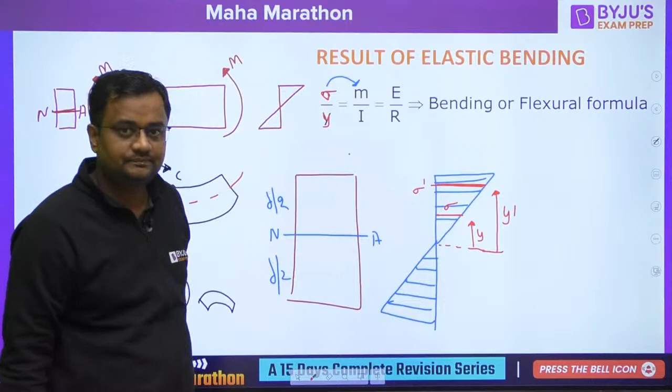Again, sigma is the stress at y distance from the neutral axis. So if you put something different, y dash, then you will get sigma dash. Sigma is the bending stress at y distance; M by I, moment upon moment of inertia; E by R, Young's modulus upon radius at which it is bending. So M by I is equal to E by R. 1 by R, also called curvature, is equal to M by EI.

For pure bending, M is constant. And if somebody says prismatic beam, then EI is also constant. So M is constant, EI is constant, so radius is constant. So it is a circle. The deflected shape is a circle, but only when this is constant, and this is constant for pure bending, that is M constant, and prismatic. Got it, guys? 99% of questions will come from this formula only.

Can you please do this for me? Can you please do this for me? Everybody?

Guys, see what they are asking: force. So the neutral axis will be here, at mid depth, d by 2. The neutral axis is not mid depth, it is the centroidal axis, but for a rectangle it is mid depth.

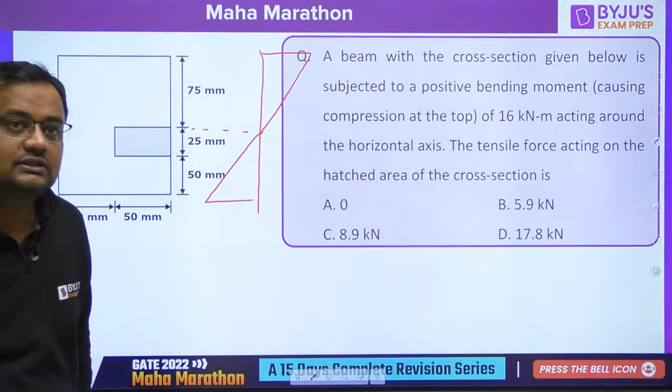Samir, yes, you can watch this, it will be totally beneficial for you. Samir, how do you like my classes?

So at these blue points, bending stress is 0. And at these green points, stress is sigma. Guys, stress variation is along the depth, not along the width. At all these points, stress is sigma. At all these blue points, stress is 0. Stress variation is assumed only along depth, not width. So here the stress is sigma.

So force is equal to stress into area. Area is 50 into 25. And stress is 0 here and sigma here, increasing linearly. So the average we can take as 0 plus sigma by 2. Average stress into 50 into 25.

What is sigma? Sigma by y is equal to M by I. M is known, I is BD cube by 12 is known, and y is 25. So sigma you will get as 14.22. Putting 14.22 here you will get 8.9 kilonewton.

Everybody, please let me know. Everybody, any doubt? Please let me know.

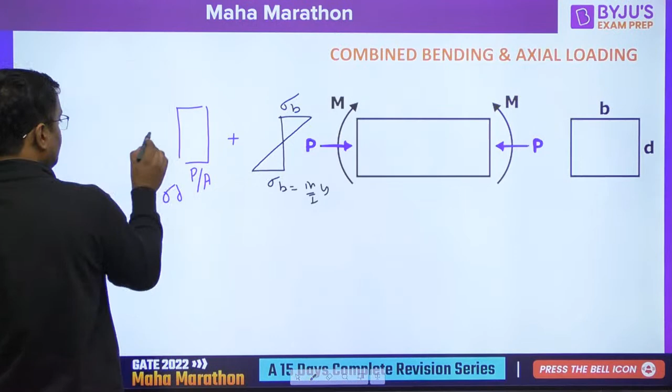And due to the purple one, it is compression, so it is force by area. This is the first thing I told you at the beginning: force by area, P by A. That is called sigma direct. And you algebraically add them and get the answers. Any doubt, friends?

Let us come to the fourth chapter now, today's last chapter. Please let me know any doubt here. Everybody. Any doubt here?

Now guys, see what I told you in the first chapter. If this is a body with P force, suppose here it will be 0.3 P depending upon the distance, and here 0.7 P, and I cut a section XX from here. When I cut section XX like this, here it is 0.3 P, and here it is downward 0.3 P.

So shear stress is shear force upon area, but that is the average shear stress. The actual variation of shear stress is given by this formula.

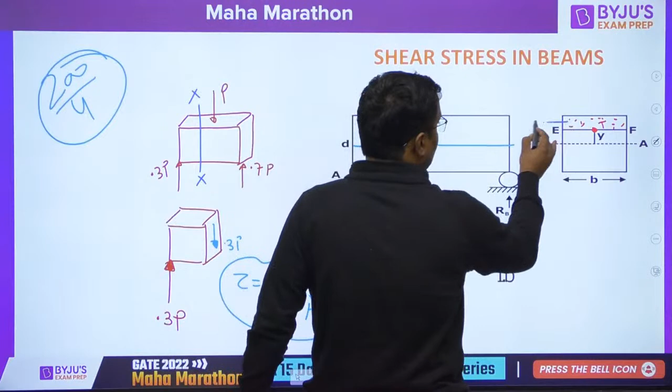What is the actual is given by this: if you take any location, and from the neutral axis you go above to any point T, this is the T point at y distance from the neutral axis. That is the average shear stress for the whole section. The actual shear stress at any point T of that section is given by the shear force at that section times area, where area is the area above that, and y bar is the center of mass of the above area.

Similarly, if T is below, then the area is this, and y bar is the center of this from the neutral axis. So A is the area, y bar is the centroid, upon I into B. I is the moment of inertia about the neutral axis, B is the width of the section. From here you get the actual variation. I am not going into the derivation here.

For the rectangular section, it is like this. It is always 0 at top and bottom, and it is parabolic. You can derive it from that expression, and tau max here is 3 by 2 of tau average. Tau average is shear force by area, S by BD. For a circular section, tau max is equal to 4 by 3 tau average.

Okay. Now, can you please make this for me? Figure questions are asked in GATE. This is a very interesting part for students. This is the figure question asked. See, always remember 2 points. It is 0 at top and bottom, and parabolic variation.

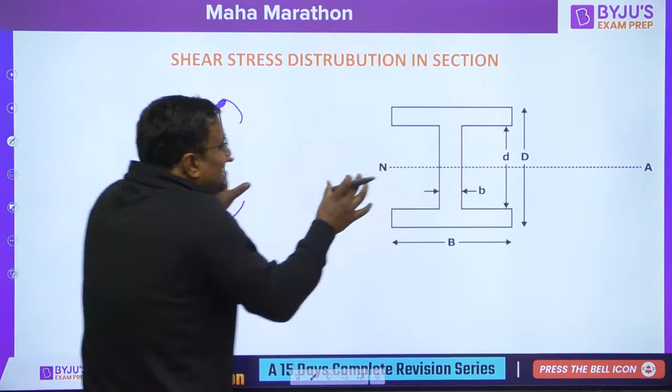Suddenly the area decreases. Shear stress is force by area, so when area suddenly decreases, stress will increase. Like this. Always remember 2 points only: 0 at top and bottom and parabolic variation. Area increases, stress decreases. Area decreases, stress increases.

Please let me know this one. Everybody.

Okay, see, it is 0 at top and bottom. Parabolic variation, then area decreased. Area decreased, so stress will increase. Then parabolic variation.

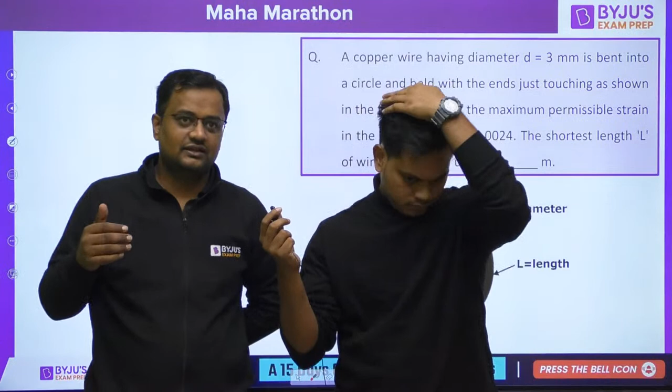And guys, see, we are studying for so much time. I guess it is 2.5 hours. Just let us have a 5-minute ask us anything, to me and Joshi sir. Anything you want to ask us, then we can do the questions later on. Otherwise, there are few things we can tell you since we are getting a lot of messages. Sir, आपको भी बहुत message आ रहे होंगे students के, and most of these questions are related to formulas, how to remember all those formulas. I'll ask Abhinav sir how he used to remember formulas when he was preparing. Sir, what was your strategy?

Sir, actually, to be very frank, I have no strategy. That time, I was not the kind of person making strategies, going with the flow. Just 2 months before the exam, I made a very thin copy and wrote some formulas that were frequently asked, and daily I was revising it. And I believe if any student is literally preparing, suppose SSD, or tomorrow at 5 p.m. you are taking fluid mechanics on the same channel, he will be doing PYQ, at least 1 or 2 test series.

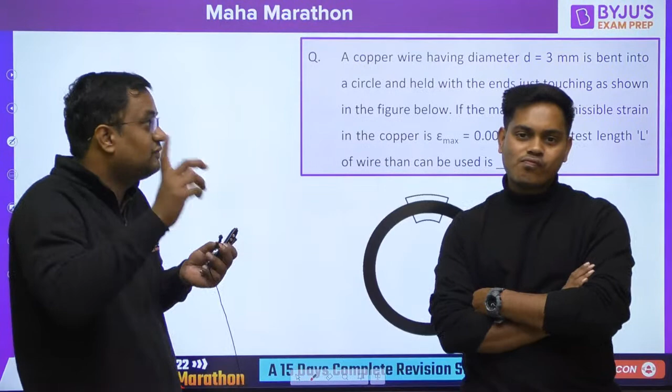Sir, I would just want to ask you, when you have gone for the exam, many students will not complete 100%, even rank 1. Might be all subjects you will be doing, not 100% topics. How much percentage had you covered when you gave the exam? Sir, actually, when I gave the exam, I completed 100%. Because I was dedicatedly preparing for that particular exam only. I made a mistake.

In my final year I tried to be Ajay Devgan. So I was trying to stand on two different bikes like this. On one leg was SSB preparation for the Indian Army, and my other leg was preparing for the GATE examination. And that went terribly wrong: I did not even clear the SSB, and I did not get good marks in GATE as well.

But next year I made sure that I'm not repeating the same mistake, and that is the only thing that we want from you also. If you're making a mistake, that is perfectly fine, just don't repeat it, okay?

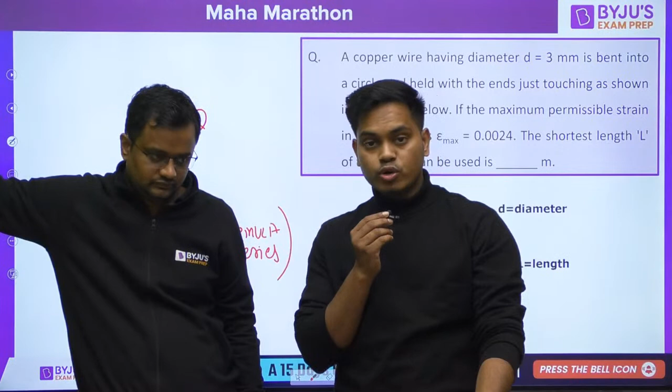Ninja special. Acha, there are two things which I would like to acknowledge, and please guys, send me a heart sign if you are having the same trouble. First is related to the short notes. If you are having any issue or doubt related to short notes, please send the heart sign, because we'll acknowledge the whole thing. And the second thing is about getting less marks in the test series, and that is already affecting you by demotivating you. So if you are facing these two issues, please send us a heart sign, and accordingly we are going to reply to you. Please everybody, full power.

Maybe I am doing the same mistake. Ajay Devgan: 31st Jan MHADA Maharashtra, then GATE, then ESE. Arey bhai, at least you are having bikes on both sides. I had a horse on one side and a bike on the other side.

So see, one thing I can say about short notes. Sir, had you made short notes? Ever prepared? No. Never. I haven't prepared them. But yes, there was a dilemma in my mind all the time that I should have made them, I should have made them.

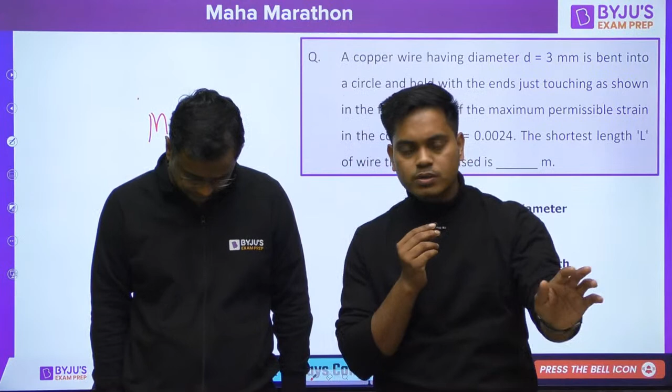Today I can say, if you haven't made short notes, it's perfectly fine. And if you have made your short notes, that's fine too. Just make your brain less confused, less in dilemma. That is the only important thing right now, to make your brain super clear. Those who make short notes get selected, and those who don't make short notes also get selected. Whatever suits you, you have to do that, okay?

Coming to the question that you are getting demotivated because you are getting less marks in the test series. What is your expectation? You should get 100 out of 100? 90 or 80? No, right? Why are you all giving the test series? You are giving it because you want to see what are the potential mistakes you can make in the GATE examination on 12th of February. So you have to make all those mistakes in the test series itself. Don't look at the marks, look at the mistakes you are making. That is more important, and do not repeat those mistakes.

If you are like me, you forget about those mistakes. Note them down, and please recall them whenever you are going to give the test series. That is very important. Okay, I think guys, that's it for today.